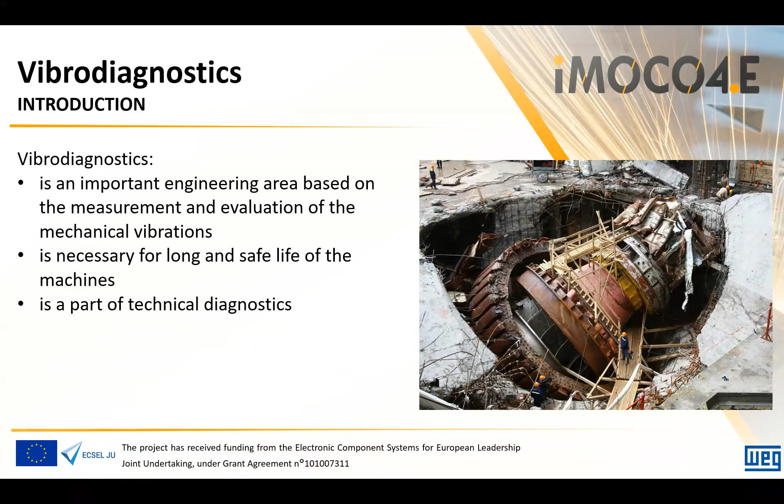Vibrodiagnostic is a subpart of the technical diagnostic, which includes, for example, tribology, thermal diagnostic, sound diagnostic, and many others. It is a non-destructive type of diagnostics as well as non-dismantling method performed in the place of installation of the machine. This is very beneficial, because the diagnosed machine cannot be turned down, disassembled and transferred to the place where the diagnostic can be performed.

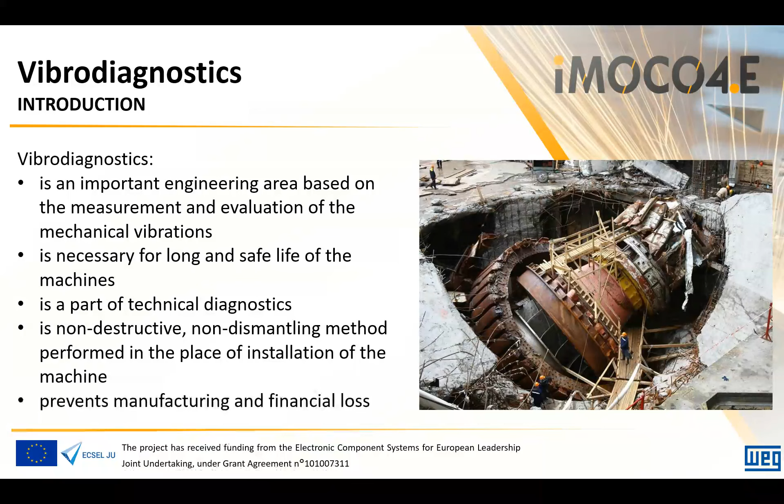Vibration-based diagnostic can save manufacturing and financial losses thanks to the early fault detection. For the vibrodiagnostics, mechanical movement of the vibrating surface is measured. To do this, contact or non-contact sensors can be used.

Movement, and also vibrations, can be described by one of the following quantities: displacement of the vibrations, represented by the distance of the moving mass point; vibration velocity, representing a speed of the moving mass point; and finally vibration acceleration, which describes the acceleration of the moving mass point. The type of measured quantity depends on the machine type, standard for the particular machine, expected frequency range of the signal and the fault type to be diagnosed, and finally also on the knowledge and experience of the user.

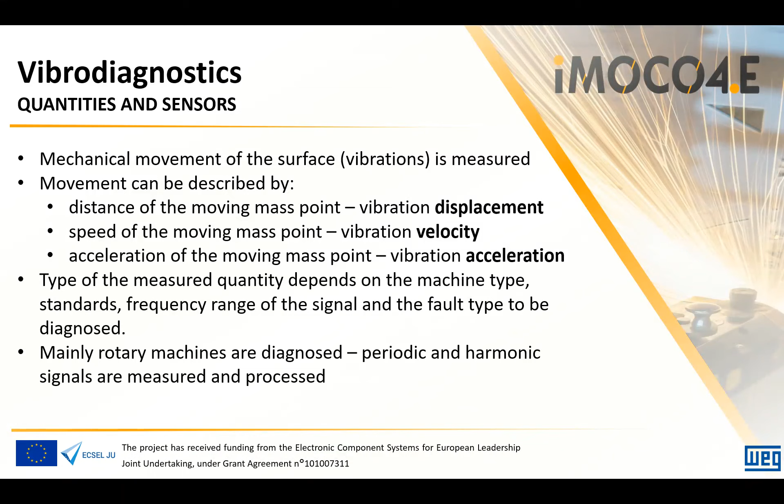In the practical industrial environment, the rotating machines are mainly diagnosed. From this reason, measured, processed and diagnosed quantities are periodic and harmonic.

Sensors used in vibrodiagnostic: accelerometers, sensors measuring input mechanical vibrations and providing the user electrical signal, mainly voltage or current, proportional to the measured acceleration, are one of the most used sensors in industrial vibrodiagnostics.

In the top part of the screen, standard industrial piezoelectric accelerometers can be seen. They are always in metal housing with appropriate IP rating against dust, water or moisture. Thanks to the robust housing, they can be directly mounted onto the machine to be diagnosed. They have an industrial connector, and the signal sourcing from the accelerometer represents input acceleration as current loop, or as an electric charge.

In the bottom part, the MEMS, micro-electromechanical systems, devices can be seen. These, relatively modern and prospective electronic components, are intended to be built into the electric circuit, on a printed circuit board. They need additional electronic components for their successful function and ongoing signal processing. Their advantage is in the low price, small size, and also in the sufficient noise parameters compared to the standard piezoelectric accelerometers.

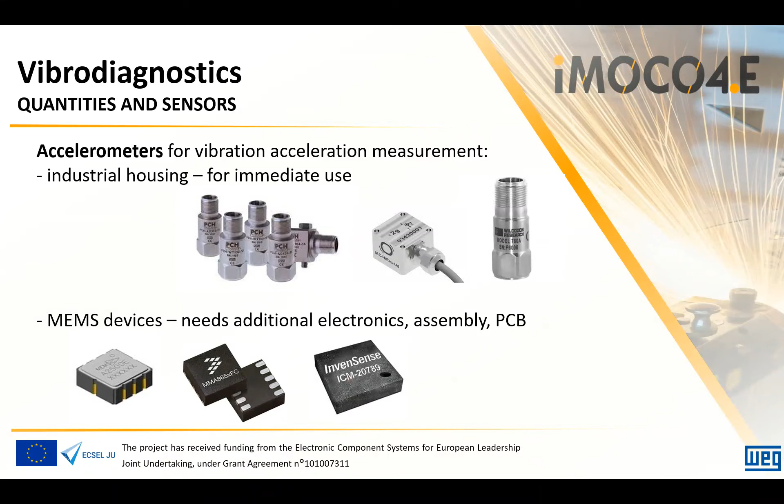Eddy current sensors, which are used to measure the displacement of vibrations, use the eddy current principle. From this reason, they must measure the distance only from electrically conductive material, where eddy currents can be initiated. Typical range for distance measurement is from 2 mm up to 16 mm, and the sensitivity is, except for other conditions, dependent on the material of the sensed object. Typical displacement sensors can be seen in the top part of the screen.

In the bottom part, passive electrodynamic sensors are shown. They are based on the principle of a moving permanent magnet in a wired coil and induction of voltage dependent on the speed of moving, which is proportional to the vibrations affecting the sensor. These sensors have relatively high dimensions, compared to the accelerometers and eddy current sensors, and due to the mechanical principle of measurement, they also have relatively low high-limit frequency.

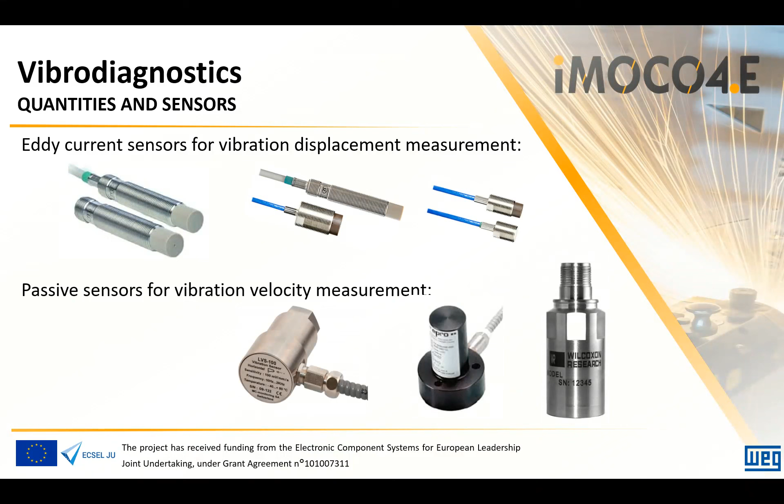From this reason, they are used mainly for low-speed machines, where the generated and measured frequencies are relatively low. This type of sensor is also used as geophones for measurement of earthquakes as well as other geological phenomena. Except for vibrations, other quantities are measured as well.

One of the most important quantities in vibrodiagnostics are the revolutions of a machine. Revolutions are measured exclusively using non-contact methods, using optical or magnetic sensors. A special measuring wheel containing a defined number of teeth is rigidly connected to the measurement shaft, and the magnetic sensor is, let's say, counting the metal teeth.

Another group of measurement sensors or equipment are the laser vibrometers. They are quite expensive, but very precise and have high accuracy. These sensors are mainly used in laboratories during scientific experiments, for on-demand diagnostic, or in applications where using standard sensors could be expensive, problematic or even impossible.

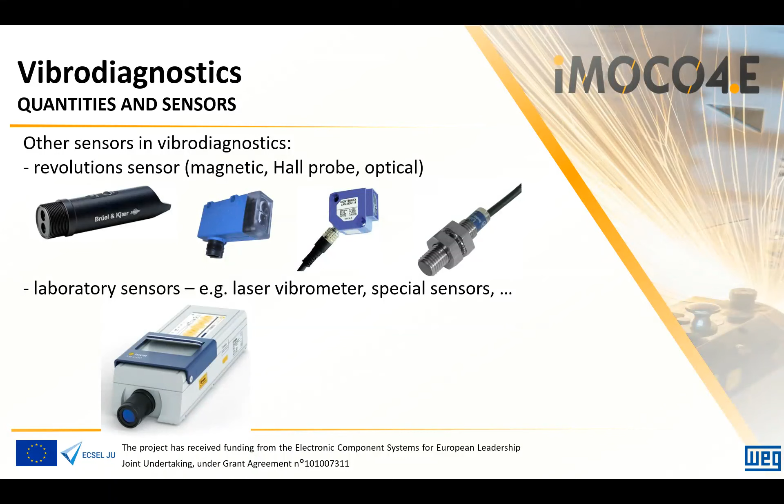A big advantage is that you don't need to prepare the place for any standard sensor, like drilling a hole, creating a thread, mounting or gluing the sensor, preparing cabling and the measuring unit. A user simply turns the laser on, focuses the beam to the measured surface, and executes the measurement.

Now let's have a look at machine state evaluation and analysis. Evaluation of the machine state tells the user about the state of a machine, often called machine health. But it tells the user nothing about the root cause of the problem to be able to solve or repair it. On the other hand, machine state analysis analyzes the vibration signal, and the procedure tries to find the root cause of the problem.

So, machine state evaluation only announces that there is a problem thanks to increased vibrations. This process is covered by international standards dependent on the machine size, type, power, usage, etc.

Very often only the single value condition indicators are calculated and provided to the user. One of the most used is the RMS value of the vibration velocity, measured in the frequency range from 10 Hz to 1 kHz. This is frequently called the ISO vibration velocity value, and is based on the ISO 10816 international standard. For any machine, the user can find the appropriate standard.

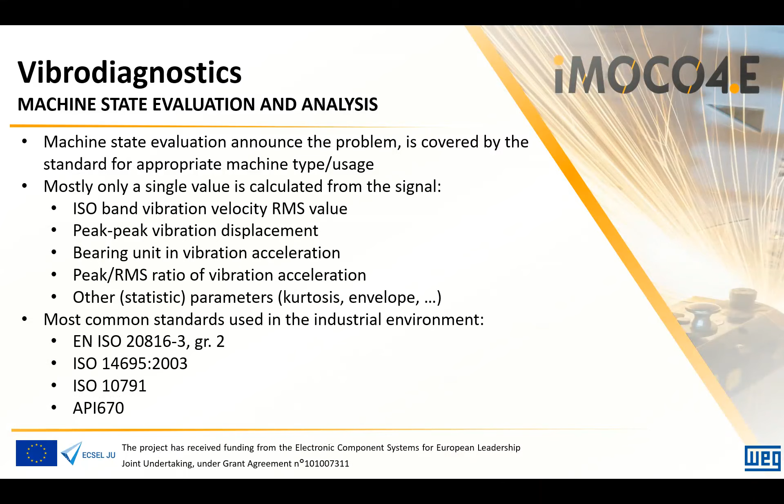In the bottom part of the screen, you can see examples of the standards for radial or axial industrial fans, machining centers, or the well-known API standard, used mainly for machines with sleeve journal bearings, used in the United States. As previously mentioned, machine state analysis is trying to find the root cause of the faulty state of a machine.

Unfortunately, most of these procedures are not covered by a standard, and are based largely on experience. For machine state analysis, advanced condition indicators calculation is mostly used. One important type is trending of the data.

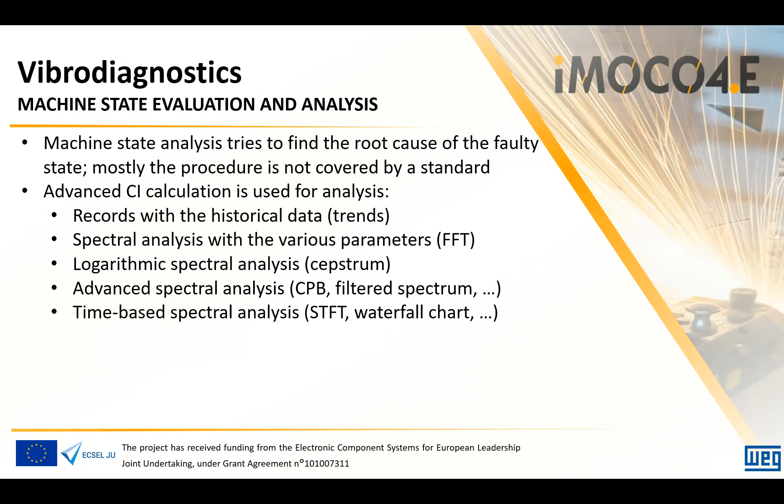A trend is a historical record of a quantity, and it does not depend on whether the quantity is a single number, like ISO vibration velocity or temperature, or the complete frequency spectrum of a signal. It is recommended to trend all possible values, because the user does not know which value will be beneficial in the future.

A very helpful type of analysis is the analysis of spectral components in the signal. Spectrum gives very clear insight into the frequency parameters and components of a signal, and is very often calculated using the FFT algorithm.

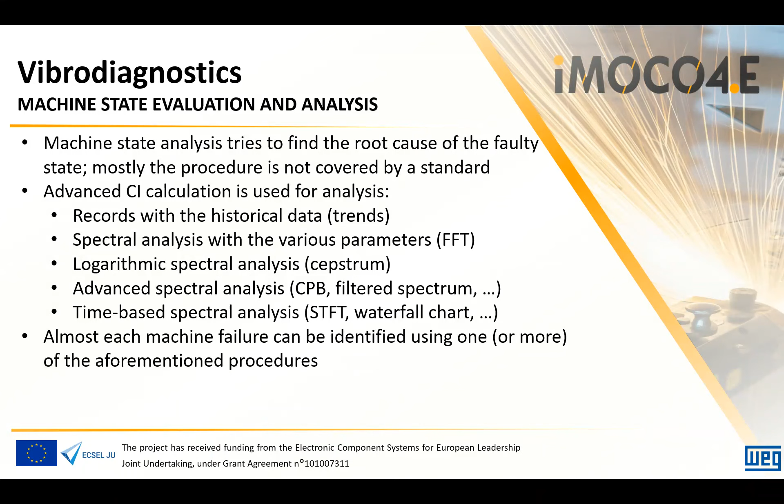There are also other analyses that take a significant place in vibrodiagnostics, like cepstral analysis, CPB spectrum, which stands for constant percentage band, different types of weighted and filtered spectra, short-time Fourier transform spectrum, waterfall charts, and many others. Thanks to knowledge of the parameters of a machine, its failures, and their manifestations in the spectral domain, the user is able to determine the possible fault of a machine based only on frequency analysis and the frequency components of the signal.

Vibration measurement is always better when relative. Although there are given limits for machines in some standards, each machine is different. There don't exist two identical machines, even if manufactured as the same type. Their vibration behavior is strongly dependent on surrounding conditions, mainly base quality, mounting features, surroundings, noise floor generated by neighboring facilities, and also the state of wear of the components.

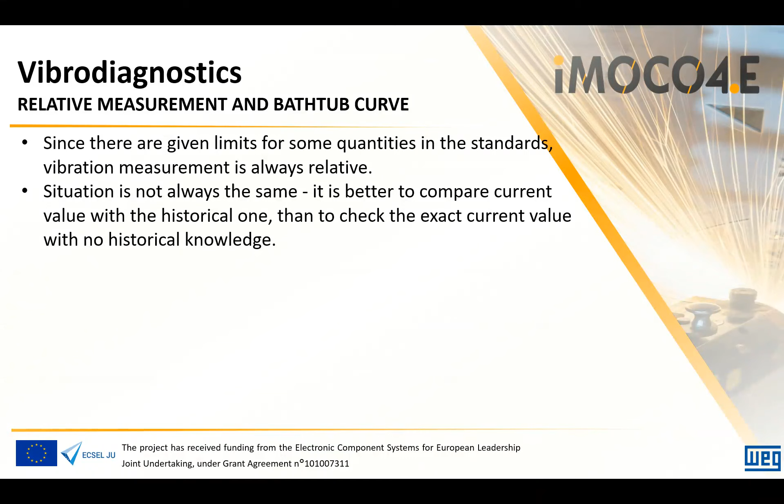For this reason, it is always better to compare current values with historical data stored in the trends, than to check current values with almost no historical knowledge. This decision process is very dependent on the previous knowledge and experience of the technical personnel.

But also, the price of a spare part can be placed there. The part is very expensive at the beginning of the component lifecycle, because it is pretty new and not many components are manufactured yet. In the operating period, a lot of spare parts are produced and the stocks are full of them, so the price is low. At the end of the machine lifecycle, there is a lack of the component on the market, so the price is relatively high.

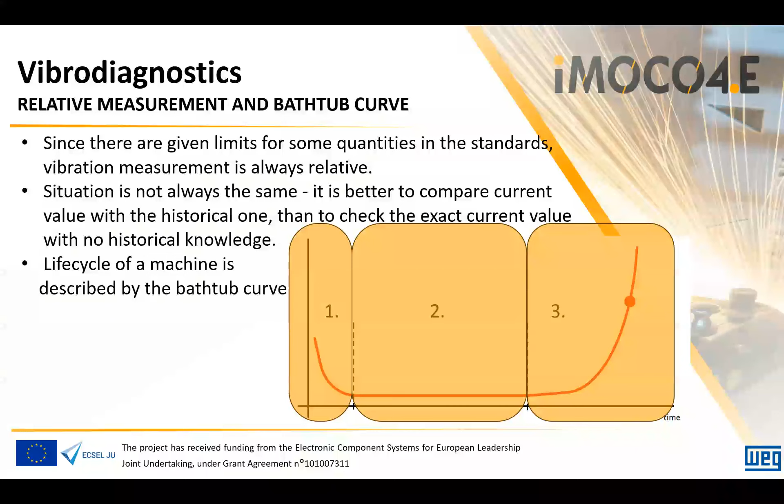Rotor unbalance, as the main and most typical fault, is mentioned first. In practice, a combined type of static and dynamic unbalance takes place, and this type of fault can be fixed by the balancing process. Misalignment of the clutch is caused by the non-ideal plane of the motor, as the propulsion, and the load.

This misalignment can be parallel or angular, but in practice, combined misalignment often occurs. The misalignment can also be caused by thermal expansion, due to different temperatures on the side of the propulsion and the load. Another very common failure is rolling element bearing fault.

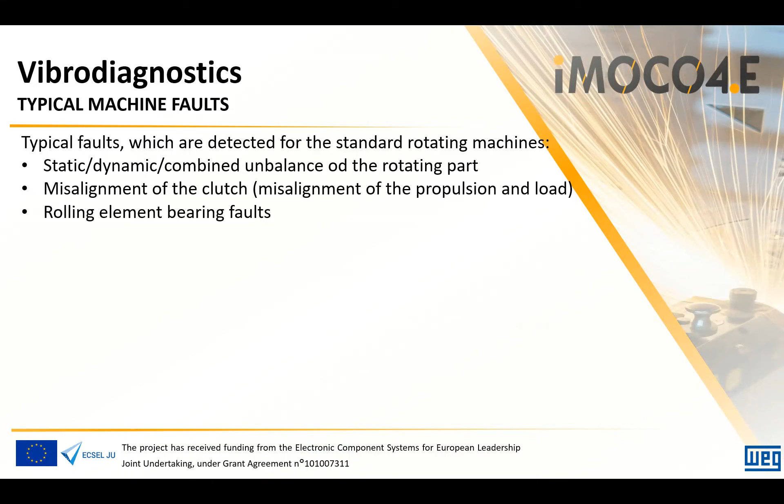This type of fault has several stages of severity, and there exist many methods to diagnose it. It can be said that almost every world-famous manufacturer of vibrodiagnostic instruments has its own developed method for bearing diagnostics. A similar situation exists with the diagnostics of gearboxes and gear wheel wear.

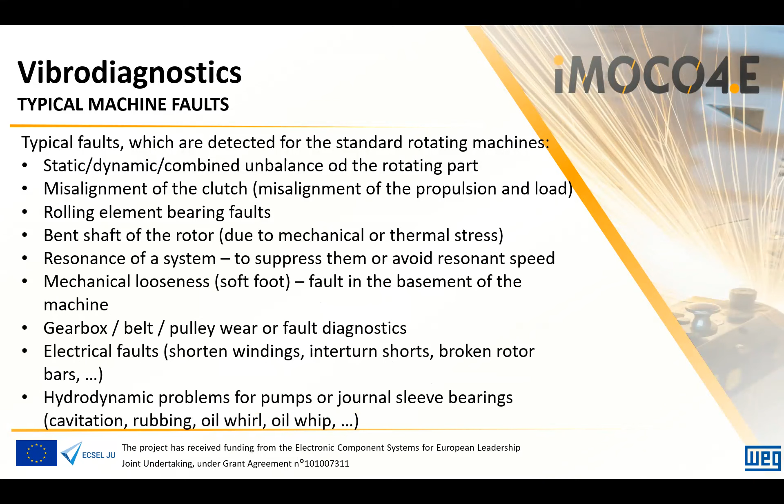Other faults, like bent shaft, resonance of a system, pulley wear, or mechanical looseness are relatively specific and not commonly occurring faults. It is good to note that there exist a lot of other mechanical faults which are not listed in this slide, and which are also specific to particular machines.

What are the consequences when the machine failure occurs? As a first symptom, operational vibrations are increased. This is the main and most important issue. Other aspects are only the consequences of increased vibrations.

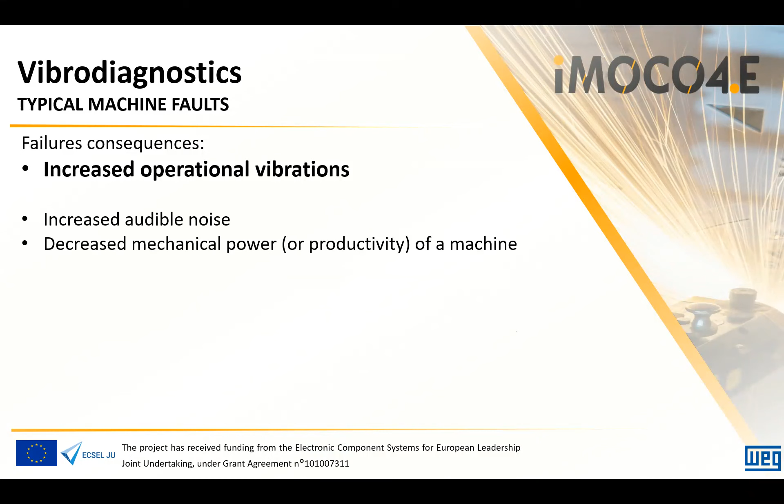An aspect which comes hand in hand with increased vibrations is increased audible noise. In short, the damaged machine is louder than the healthy one. If there is a fault, mechanical power or productivity of a machine is decreased. For example, a turbine generates less electricity, a mechanical press has not enough power, etc. In addition, manufacturing quality can also be decreased, for example a CNC machine with a damaged tool creates less precise specimens compared to a healthy machining tool. The machine, with increased wear, consumes more power from the grid and produces more heat compared to the healthy state.

Due to malfunction of any component, increased wear of bearings, fan components, belts, or pulleys takes place as well. In case of machine failure, the lifetime of the machine is shortened, which leads to more frequent or unplanned stops, leading to unpredictable costs for repairs and, in fact, a stop of the machine or of the overall technology, if the machine is part of crucial infrastructure.

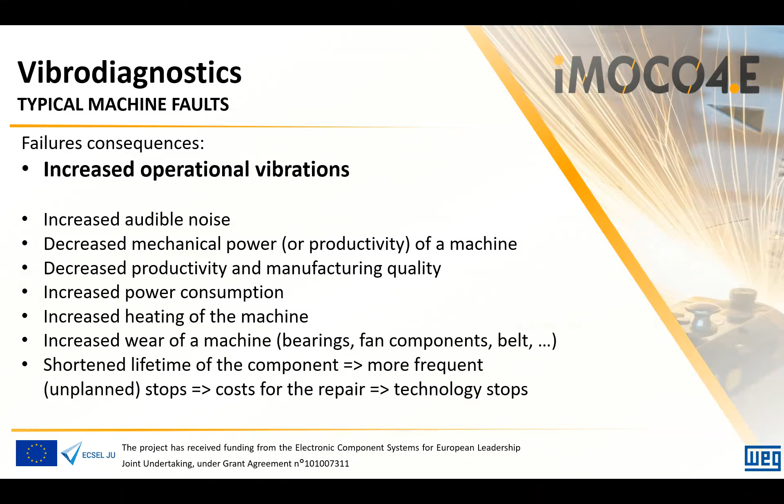In case of vibrodiagnostics of an elevator, two major parts are diagnosed. Firstly, diagnostics of the health and state of mechanical components, such as propulsion, inverter, gearbox, pulley, leading ropes, door malfunction, and so on. The second major part is diagnostics of the overall cabin vibrations and exposure to the human standing on the ground inside the lift.

This parameter correlates with the comfort of the passengers during the ride, and it is called ride quality in the standard. Diagnostics of the lift is also covered by the standards mentioned in this slide.

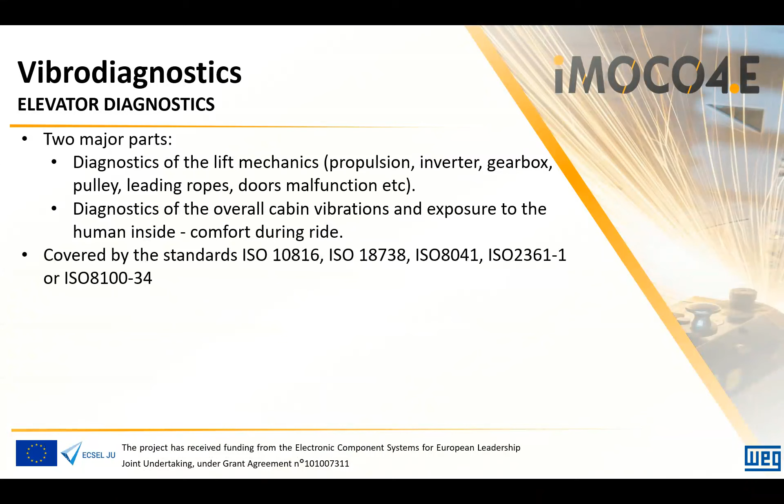On the right side you can see the typical ride profile of a lift cabin ride: a positive acceleration peak while the lift is departing, then the ride represented by no acceleration, and finally braking represented by a negative peak in acceleration. The ride quality is, according to the standard, measured and evaluated in specific regions of this typical lift acceleration ride profile, to be comparative and generalized between several lifts.

The quantities evaluated for lift diagnostics are the following: vibration velocity in meters per second, vibration acceleration in meters per second squared, and acceleration jerk in meters per second cubed. Acceleration jerk can be imagined as a twitching or jerking of the acceleration.

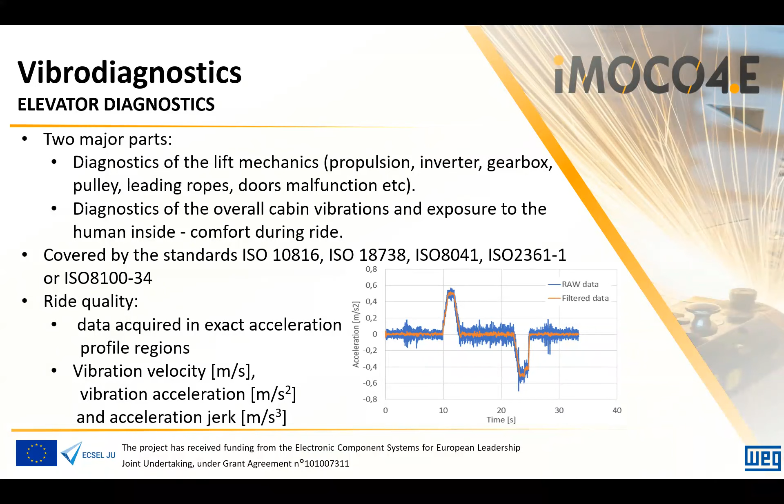For the diagnostics of a lift, a special wireless vibration sensor has been designed, developed, and built. The sensor is a battery-powered device with a magnetic adapter, suitable for temporary or long-term monitoring of the vibrations of a lift. As can be seen from the structure on the right side of the screen, the sensor contains 3 MEMS accelerometers, ADXL355 and ADXL1002, for broadband vibration data acquisition in all 3 perpendicular axes.

Since the sensor is battery-powered, a lithium polymer rechargeable battery pack is installed inside the instrument. With a capacity of 200 mAh, it provides sufficient operating time for the sensor and for sufficient data acquisition. Charging of the batteries is ensured by the wireless charging standard Qi, which is commonly used in almost all present small wireless devices.

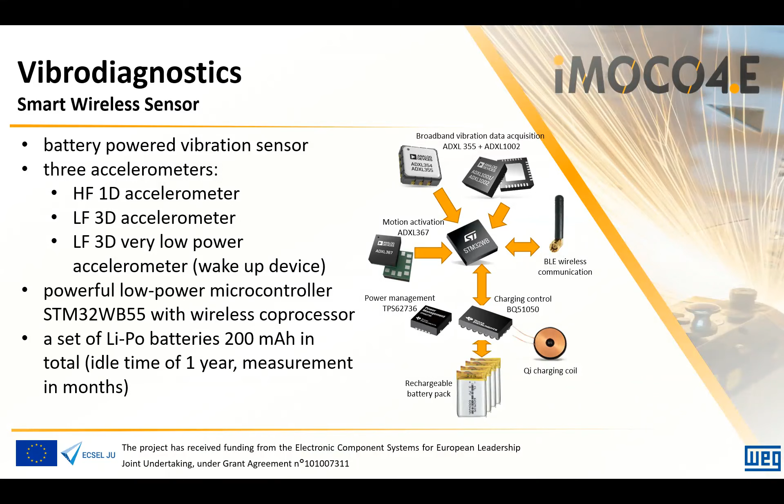The smart wireless sensor is placed in a metal housing, which ensures a high industrial-grade protection standard, the possibility of precise and rough mounting to the measured place, and, thanks to this, also tough mechanical coupling with the measured surface. On the right side, an application on a PC can be seen. This application receives the data from the sensor and displays all the necessary parameters for later diagnostics.

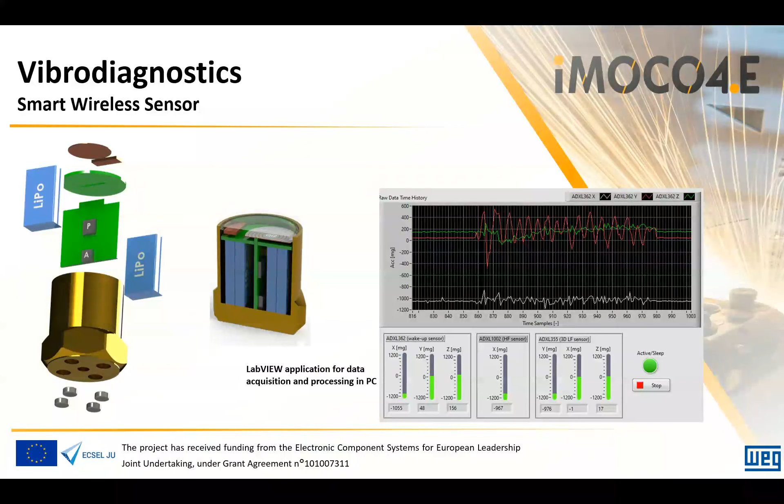The sensor render from the design stage can be seen on the left upper part of the screen. The internal printed circuit boards while charging can be seen in the middle picture, and finally a photo of the prototype of the sensor can be seen on the right side of the screen.

As a proof of the measurement accuracy and suitability of the sensor design, sample rides in a standard lift have been performed. The curve on the left bottom side of the screen represents the acceleration profile during the ride from the ground floor to the 3rd floor, through 3 floors.

On the right graph, there can be seen the first integration of the measured acceleration, blue curve, representing the velocity of the lift. After the second integration of the input acceleration signal, the displacement curve, orange color, is obtained. This graph represents the distance crossed by the lift and is equal to 3 floors with a height of 4 meters each.

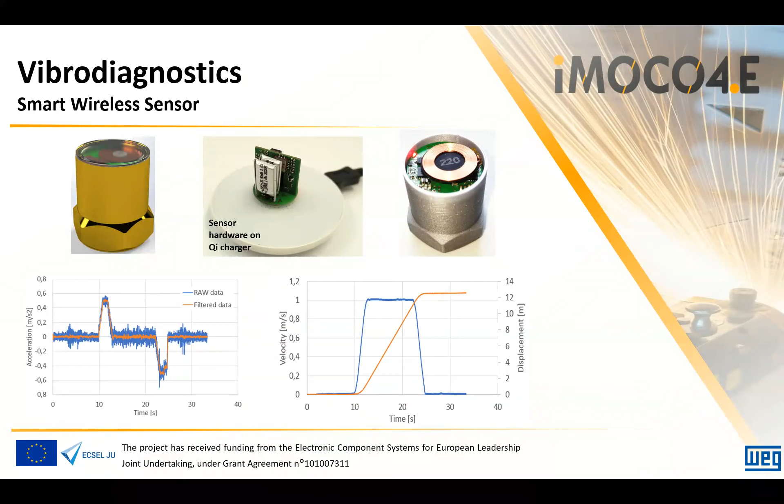Besides the traveled distance of a lift, the vibration manifestations of the lift cabin or lift propulsion can be measured and diagnosed. This brings us to the end of this presentation, and we would like to thank you for your attention.